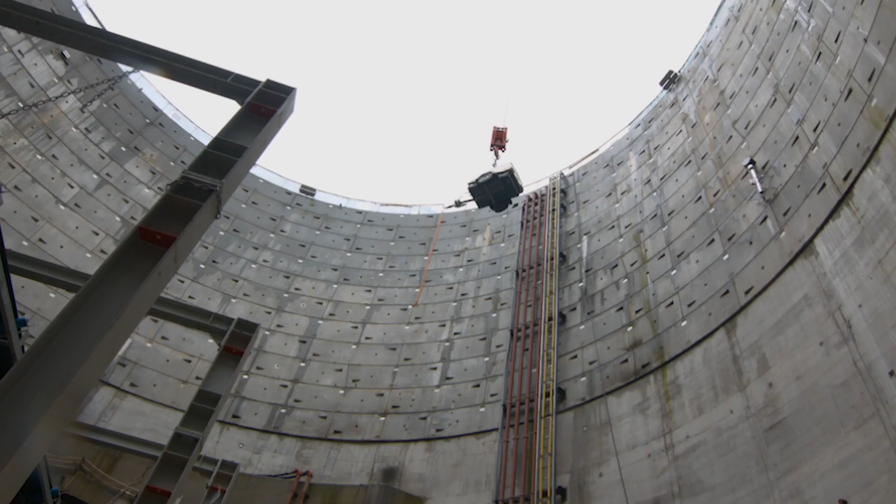It is not a new concept to avoid putting yourself in harm's way. Despite this, it is not uncommon for people involved in lifting operations to inadvertently put themselves in positions where, if something were to go wrong, they could be seriously injured.

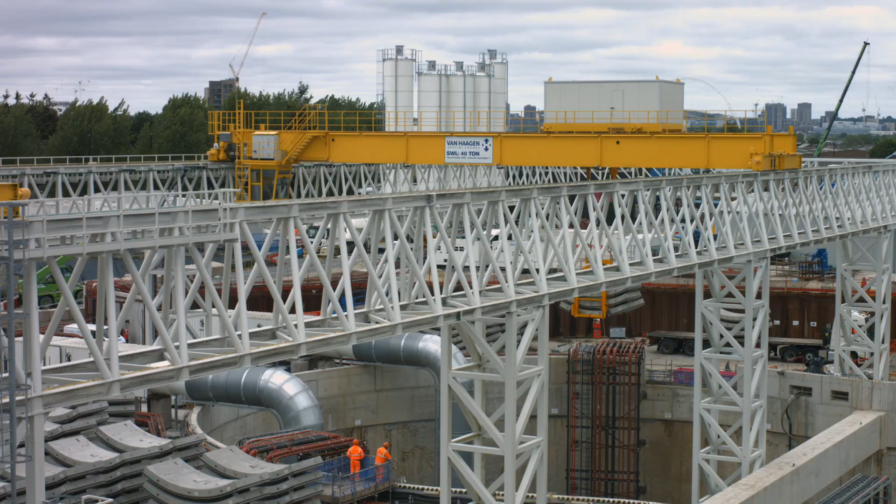If something starts to go wrong during a lift, people often act instinctively and physically intervene in an attempt to resolve the issue, rather than stopping the lift from a place of safety.

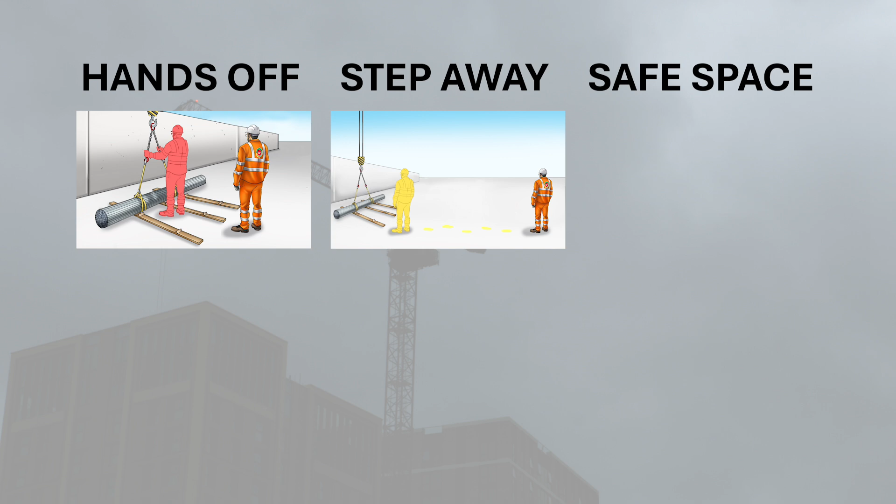This short production outlines the principles of hands-off, step away, safe space, which is about lifting personnel assessing their surroundings, identifying the hazards that are present, and whenever reasonably practicable, taking their hands off the load and moving to a safe space before loads are lifted.

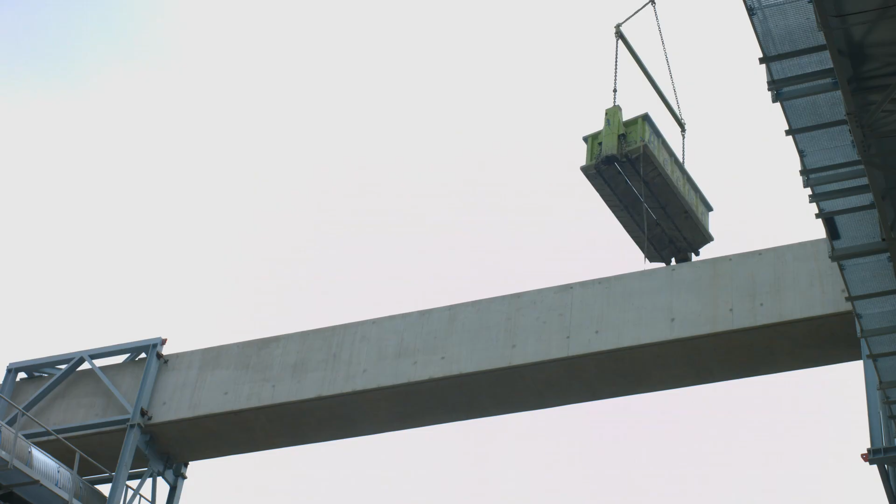We're going to be watching some typical lifting operations that you may encounter on a construction project and listening to an industry professional, Kevin Bennison, discussing the lifts with our presenter, Chris Simmons. They will be discussing how the lifting team carry out their role to ensure the safety of all personnel involved.

Sadly, there's been a lot of injuries in relation to people's interaction with loads, being in direct contact or close proximity to loads when they're being lifted. Many of those have been hand injuries, which are bad enough in themselves, but sadly there have been some fatal injuries as well of people being too close to the load. So we're going to look at some of these examples being put into practice.

So we're here and there's a lifting operations briefing taking place. Where would be the best place for the briefings to take place?

Well, that depends on the circumstances, but it would be worthwhile carrying the briefing out indoors, out of the weather, so you can get the full concentration of the team and cover some of the theory elements, some of the principles of the lifting operation. But a lot of the briefing, it would be really helpful to carry that outside, near the point of works, because then you could point out the loads to be lifted, how they're to be slung, the equipment being used, and things such as where the load's going from and to.

Good communication in the briefing, listening, eye contact. Keep it brief, stick to the main points, and ask for suggestions and confirm understanding. Great information. Briefings should be concise to ensure the key information in relation to the lift is communicated with clarity.

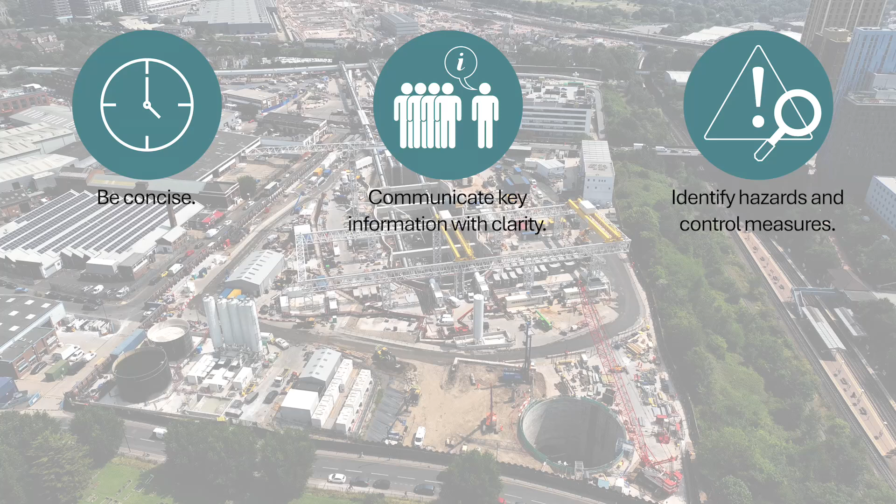The significant hazards that remain must be identified and the required control measures detailed. This will also start the process for the lifting team to consider where it will be safe to be positioned during the lift. All lifting personnel must be involved in the briefing.

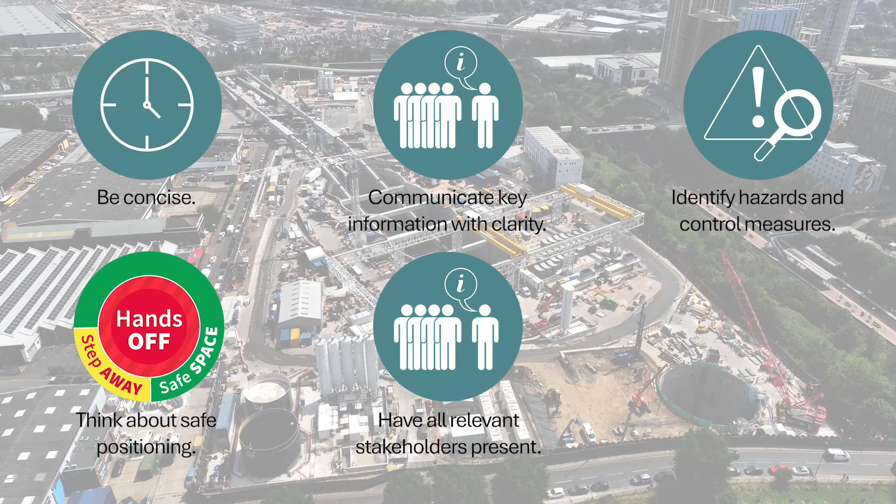It is an opportunity to confirm that the lifting team understand what was briefed and for them to ask any questions they may have.

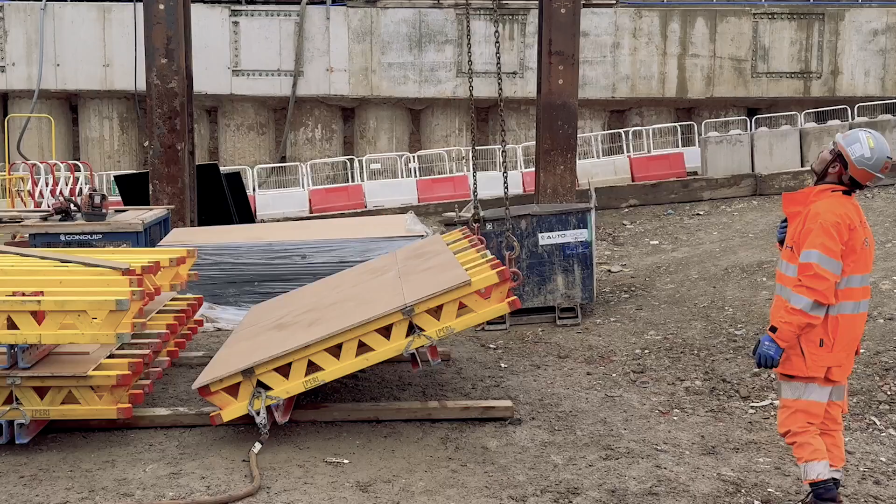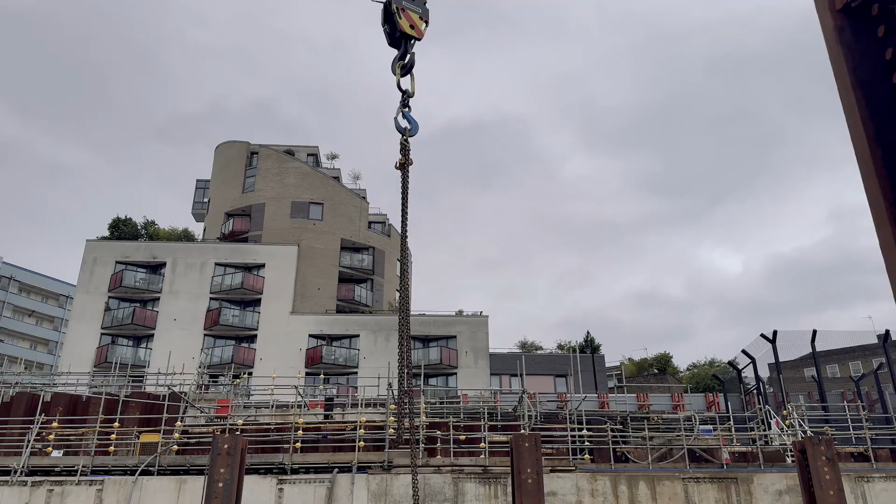We're lifting a formwork shutter panel, which gets used for pouring and shaping concrete. What the guys are looking at here is making sure the boom head stays as close as possible to directly above the position on the load, so that they maintain control of the load.

The risk we've got here, of course, is as that load is being picked up, it could move, and it's very difficult sometimes to ensure you've got the jib head exactly in the right spot to avoid any movement of the load. So what the guys have done now is they've come a little bit clear, and if the load does move, it's very unlikely to strike them.

A lot of people feel they have to be in close proximity to the load, and sometimes even holding it, whereas there are many situations where you don't really need to be in contact with the load, and it does give that little bit of safe space.

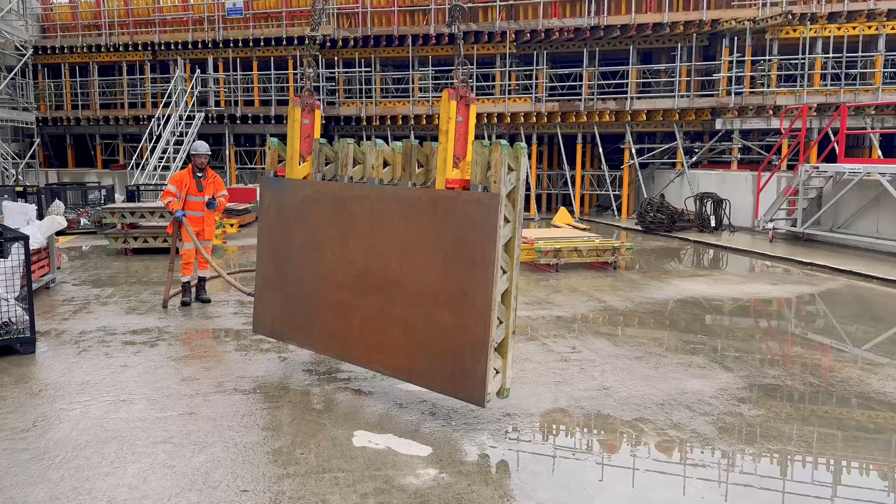They can clearly see what the load is doing in this case, they can direct the crane easily, but they're not so close that if the load moves, it's going to strike them. Rotation of the load might be required as part of the lift.

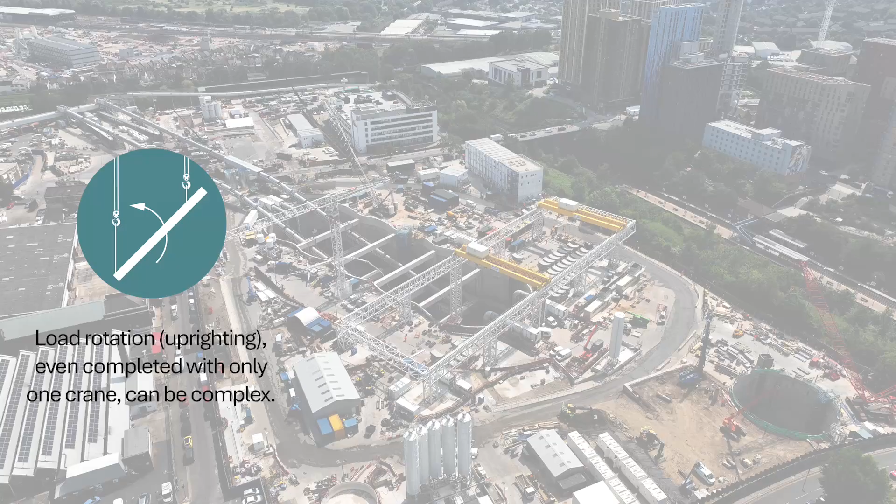Where necessary, this is done with two cranes, but often it can be achieved with one crane only. Formwork is a good example of this, where the load is prepared horizontally but then stood up by one crane only. This rotation of the load can lead to unexpected load movement if not undertaken with care, or if the crane is not directed to move with the load to keep the hoist rope, lifting accessories and attachment points on the load vertically aligned.

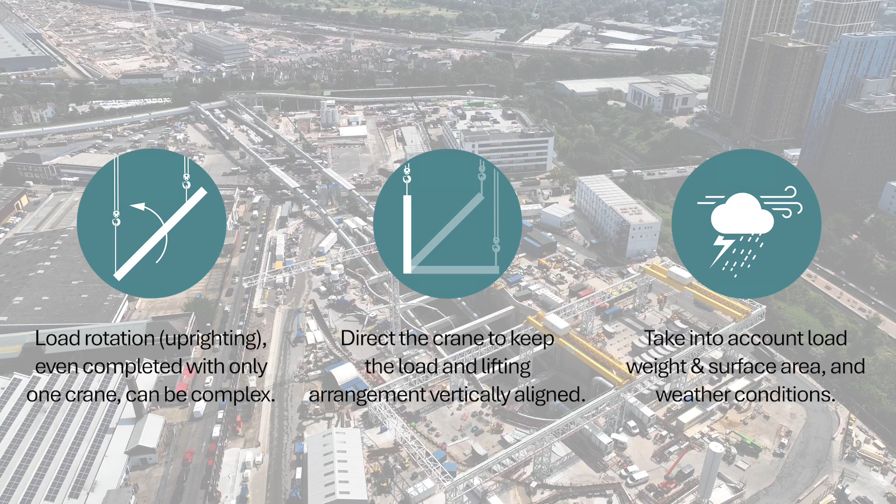Loads which have a relatively high surface area and a relatively low weight, such as formwork, are also more likely to be affected by the wind. This may cause the load to rotate or sway as it catches the wind.

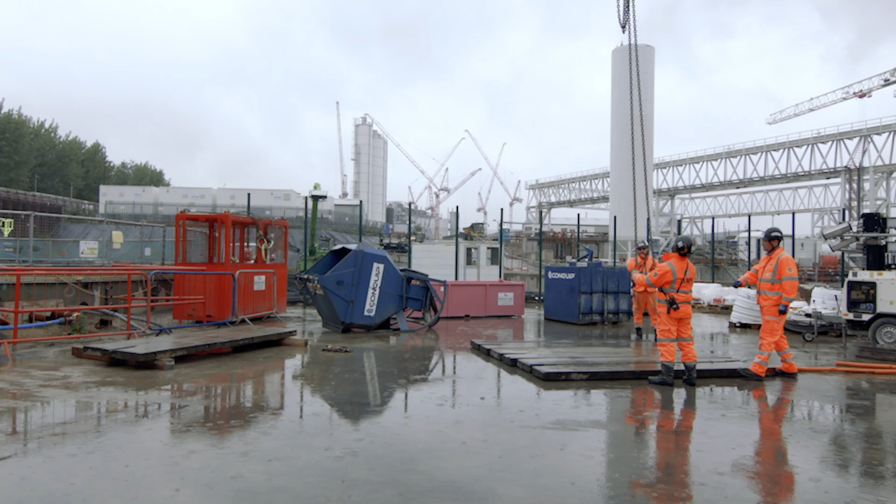So I believe that we're lifting some Ekki mats this time, Kevin, is that correct? Yeah. And what they're going to be doing here now is they're going to be stacking the mats on top of each other. The real risk there is you've now got definitely a crush risk for fingers.

So it's really important that they have their hands in a suitable position when they're landing the mats on top of each other, to avoid any serious hand injuries from those mats coming down on fingers, or fingers being trapped by the chain or whatever.

In a situation where the load was doing something that you didn't want it to do, it's just amazing that there's that instinct that sometimes kicks in for people to grab the load. I think being that couple of metres away from the load gives that time so that rather than putting your hands on the load and grabbing it if it's doing something you don't want it to do, you may stop the crane or just think of alternative action.

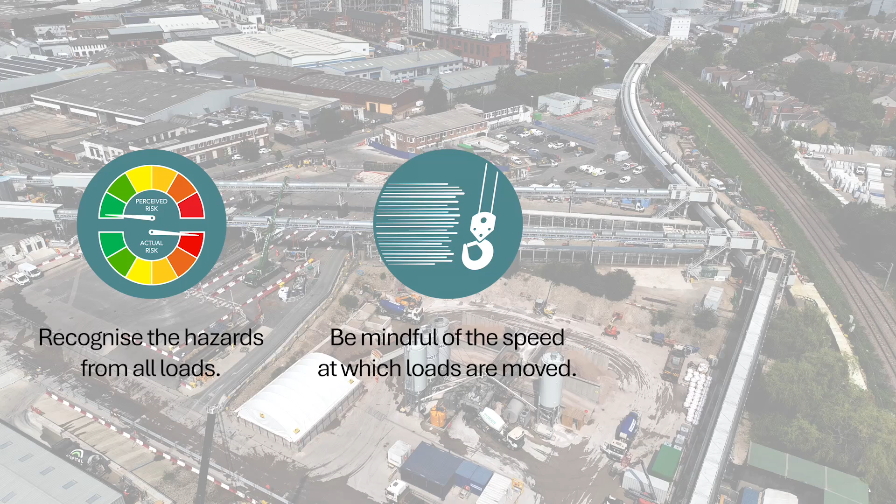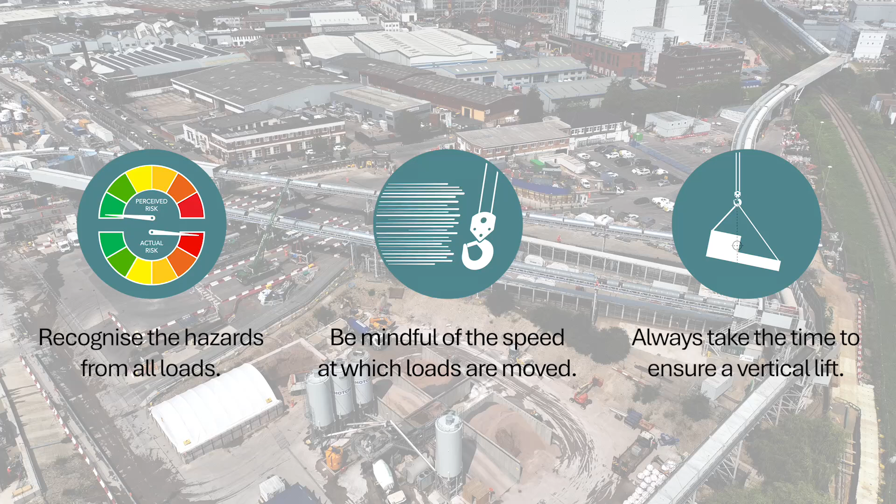Simple loads which are moved routinely are often perceived to be low risk. Because of this, they are often moved at pace, which may catch out lifting personnel. If loads are close together and fairly light, there may be insufficient attention given to aligning the hook over the centre of gravity before each lift starts. Loads which were perceived to be low risk can therefore still present hazards from unexpected movement.

So we're now landing the concrete skip. Yeah, it's going to get landed behind the concrete vehicle here just to get refilled, ready for the next pour. And he's going to use the marker here to help him with positioning the skip to get it in the right position, the ideal position for refilling it.

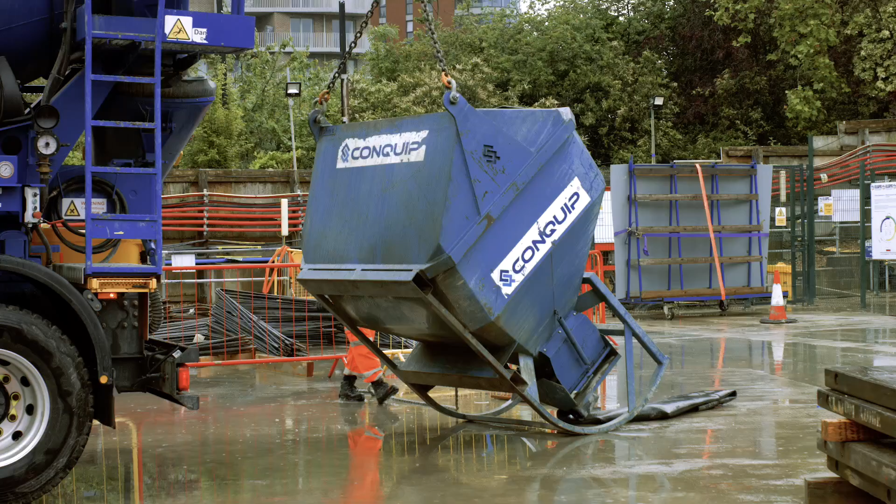This is a key point now where, as the skip's rolling over, you're not getting yourself in any bad position to end up being crushed or struck by that skip as it lays over. Watch the slinger signaller off to one side, clearly out of the way of the skip, still directing the crane, with a good clear view. So yeah, works well.

Really here, the main thing is trying to get the boom head directly above the position of the skip, so when it gets to that vertical point, you can bring it up vertically, minimising the load swing. There was a little bit of movement there, but that was nice. There's plenty of space, the slinger signaller's in a safe position, and that's the skip off, ready to go and get discharged into perhaps a formwork shutter. Yeah.

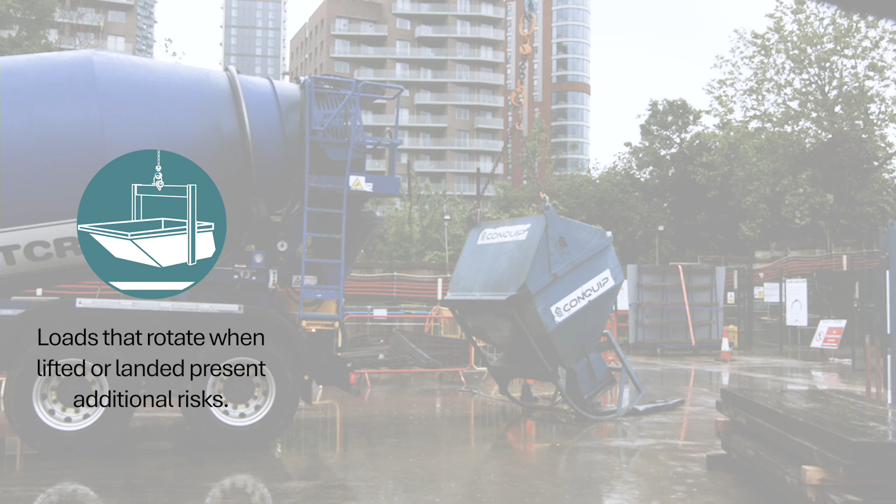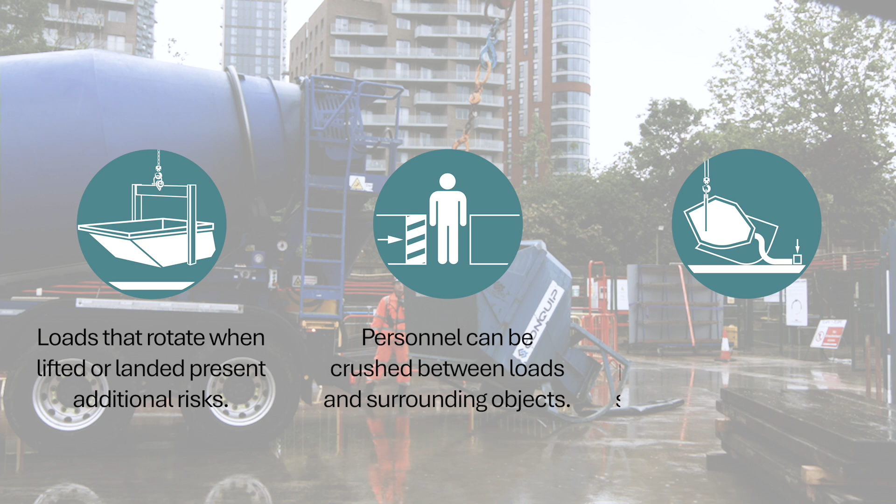Some loads are specifically designed to rotate when they are lifted or landed. If personnel are stood away from the load during this rotation, then it presents minimal risk to them. But conversely, if they are stood close to the load, they are at risk from the load striking them or from being crushed against any static objects. To assist in positioning loads such as these, it can be helpful to use positioning markers so that personnel can remain in a safe space away from the load.

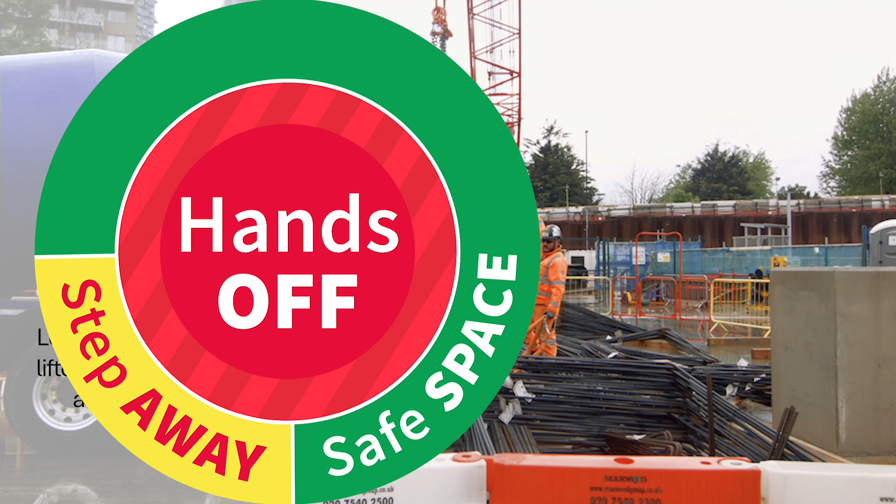So we're doing a trial lift here, is that right, Kevin? He's taking the load up just to a reasonable height off the ground, just around about waist height, so it's at a position that you can check the load fully, but it's not too high.

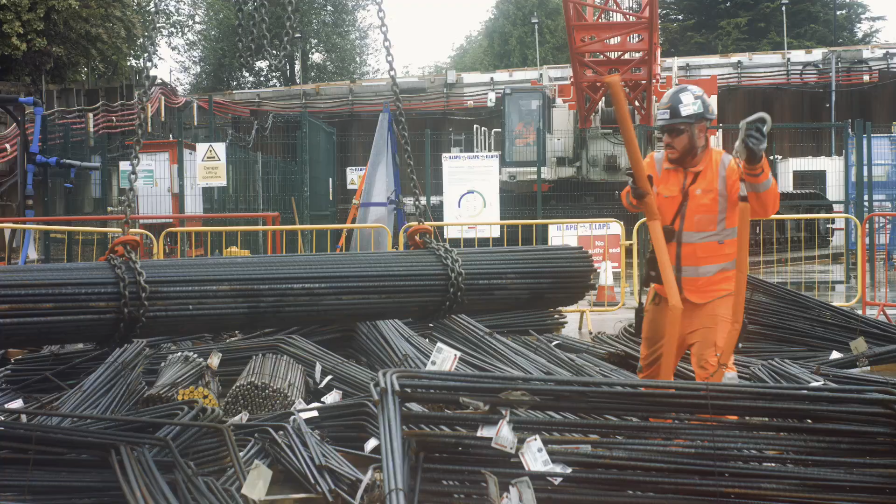I'd like to call it the 3 S's of trial lift, which is security, stability and slinging. You're checking that the load is completely secure and held by the slinging arrangement, making sure it's stable, level, balanced, and not going to come out of the slings. You're also checking the slinging to make sure slings aren't twisted, hooks are facing the way they're supposed to, shackles done up correctly.

And of course you would want to check every load that you pick up. You do a trial lift on every lift just to make sure it's safe to send off. A trial lift should be conducted for every load.

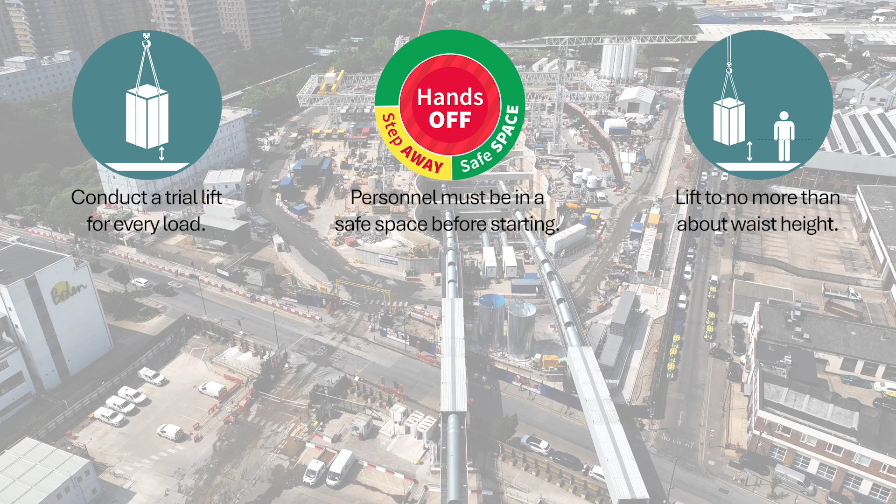Lifting personnel should be in a safe space away from the load before the trial lift starts. The trial lift should ideally be no more than waist height and will allow the lifting personnel to confirm 3 key things: load security, that the load is free from debris and that the whole load is contained.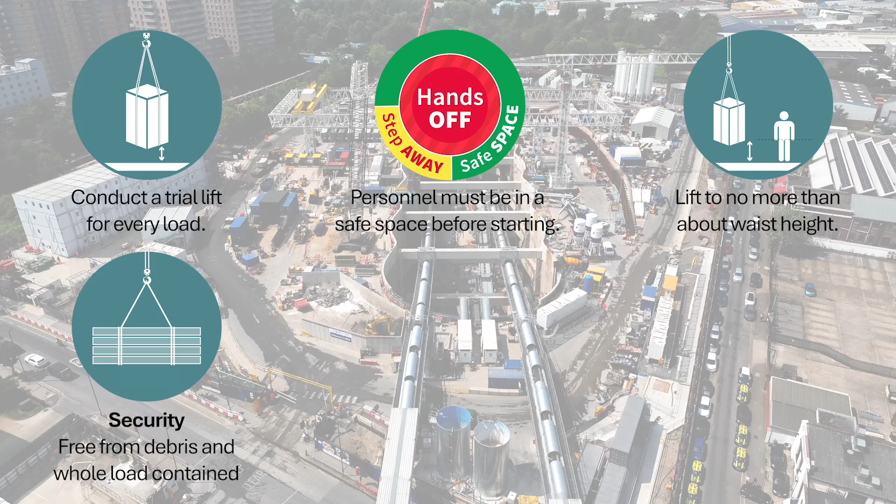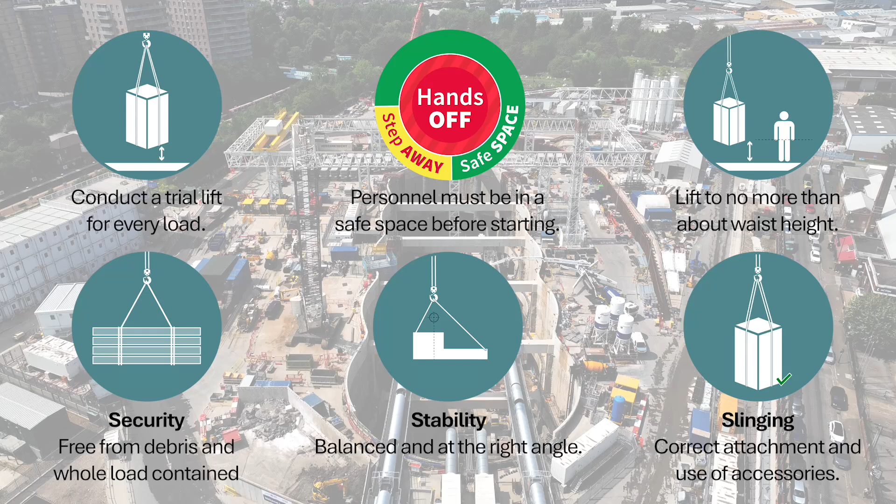Load stability, that the load is balanced and level. Slinging, that the accessories are correctly attached and being used at appropriate angles. If any issues are identified during the trial lift, the load must be returned to the ground and any necessary adjustments made before undertaking another trial lift.

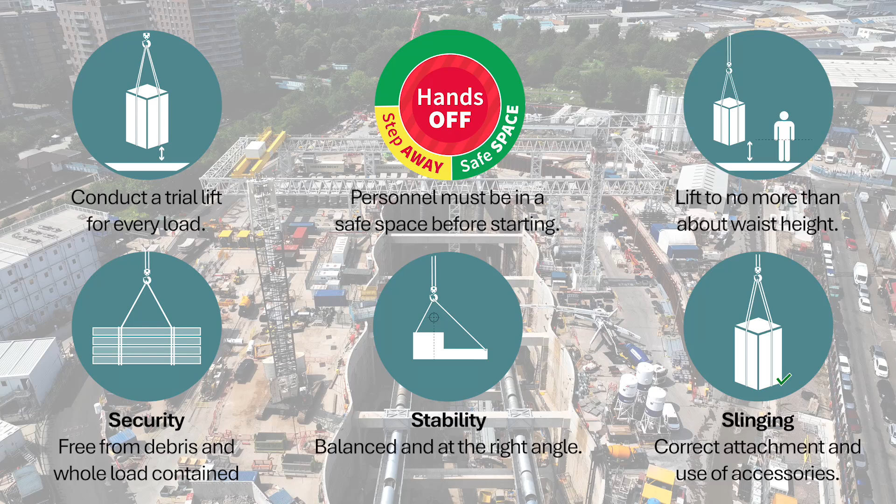One of the big things here, Chris, is they've got to look at where they're ideally going to sling the load to get that to come up balanced. In this case, there's lots of rebar there, lots of different things around them, so that can be quite difficult. But it's thinking about where we're going with the load and how can I get myself in a position that if that load moves in an undesirable manner through load swing or wind or the boom head not being in the correct position, I'm not going to be struck by it.

Their hands are off, we can see there's no risk of their hands being trapped on any part of the load or on the chain, which is good. They have taken a step away and they're about to commence the lift. So let's see what happens here.

You can see there, picked the load up, it's reasonably level, the one end maybe caught on something. There was a bit of movement on the load there, and you can see that where they were standing, they weren't in any danger, which is a good thing, because they'd already stepped back.

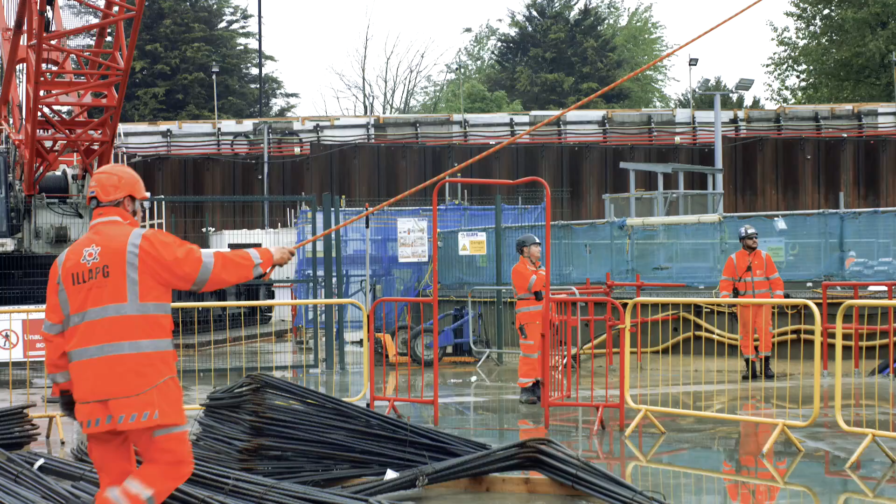The tagline is staying on the trailing end, so the load is always moving away from the tagline handler, and that's exactly what we want. We can see here as well, as the load comes up, it's vital on getting that slinging position correct so that the balance of the load is suitable.

Is this a push and pull stick he's got there, Kev? Yeah. What he'd done there was use that to actually retrieve the tagline, so that he wasn't going beneath the load to get the tagline, and pulled the tagline out towards him so then he can hold the tagline.

And good, he's using a push stick at the other end there just to stop the load from rotating and landing the load on these timbers. And there are, with regards to some points you can put your hands and it's not going to be problematic, but they didn't need to at all. That demonstrated there was just no need to put their hands on the load at all.

Now, of course, in some situations, if it's necessary, you could hold the chain above the choke and make sure your hand isn't in any position that it could be snagged by the chain or anything like that. But they didn't need to there. It was a great demonstration of actually not having to touch the load, which is exactly what we're trying to achieve.

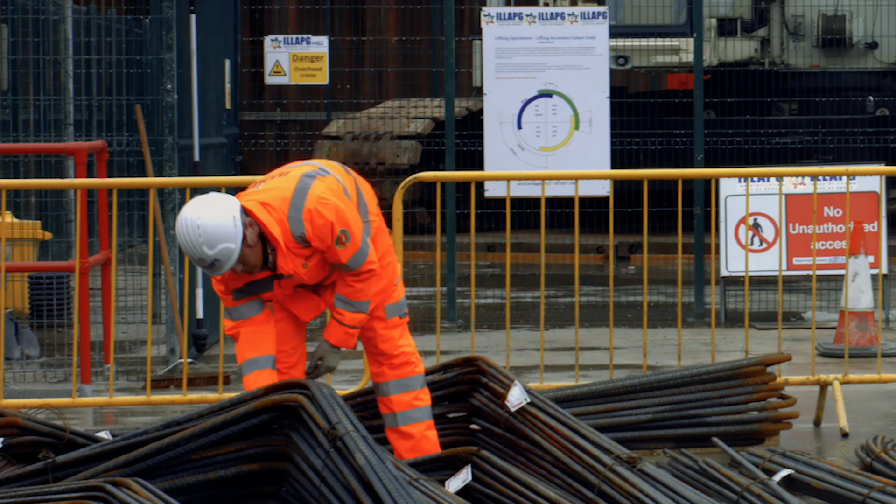Looks like at the moment there's the works manager, the supervisor and the slinger signaller in there. Who is it actually necessary to have within this restricted access zone at the moment? You'd never go in if there was no reason to be there.

Well that's pretty good here because clearly, now that the works manager had pointed out which load had to be lifted, he wasn't really necessary for being in there. And you've got to be confident, even if it's someone who's a senior rank, to ask them to leave. Of course, we're all human beings, Chris, so it's easy to make a mistake no matter what level you're at.

It's about being mature enough to ask people, whoever they may be, to leave the area if they don't need to be in there, and also for the works manager to be mature enough to go, oh yeah, fair one, I'm not supposed to be in here.

Bundled loads are likely to settle into the slings as they are lifted. If personnel were to have their hands in or on a load when this happened, there is a high risk of crush injuries. Loads can also snag on obstructions, particularly if they lift up slightly out of level, and this can lead to the load moving unexpectedly, potentially springing up, as well as moving within the bundle. If a load gets snagged, there is the potential to damage or break either the lifting accessories or the attachment points on the load.

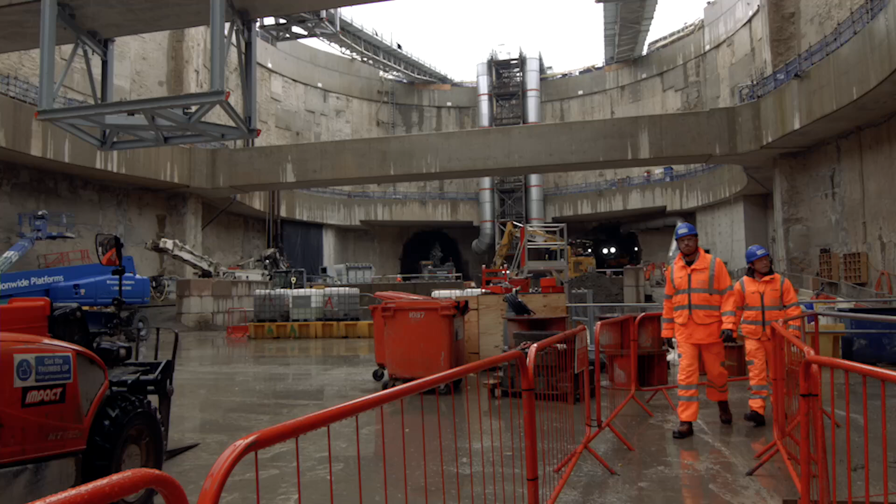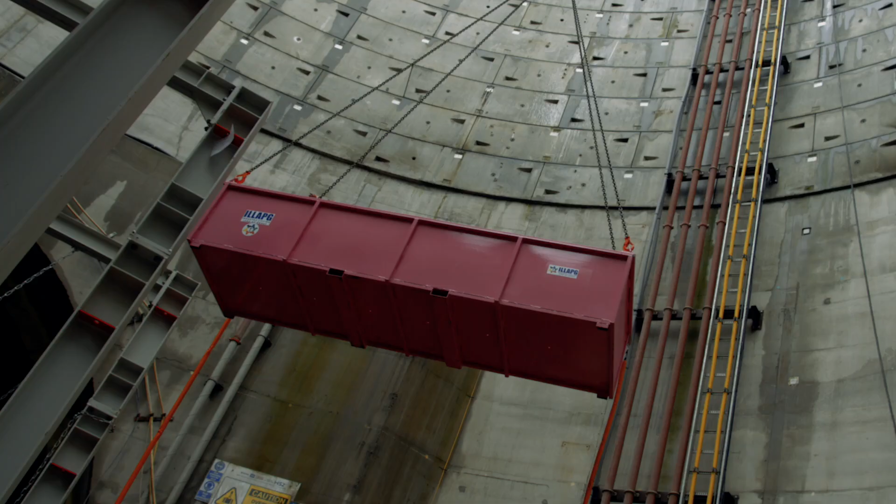You happy with the taglines here, Kevin? Yeah, so one of the guys there is going to reach out with the push-pull stick, grab the tagline, and then be able to take full control of the load. And of course, it depends on what the situation is to evaluate where the best place for the taglines is. If you've got two people on the taglines, it's actually best as it is where you've got the taglines on the same side of the load. That way, one can pull against the force of the other to make sure that nobody actually needs to go beneath the load.

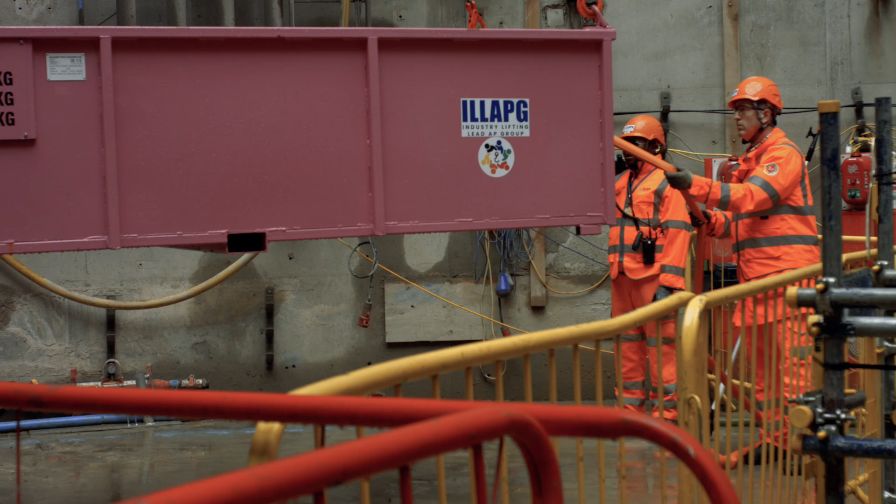The main thing here is the direction the load's going. So it's going into potentially quite a confined area here. And it's about thinking about where is the person in relation to that load. The signaller's in a good position, and you can see where the crush zone is now potentially being created as that load approaches one of those fixed objects. And the guys are clear of that crush zone, which is good.

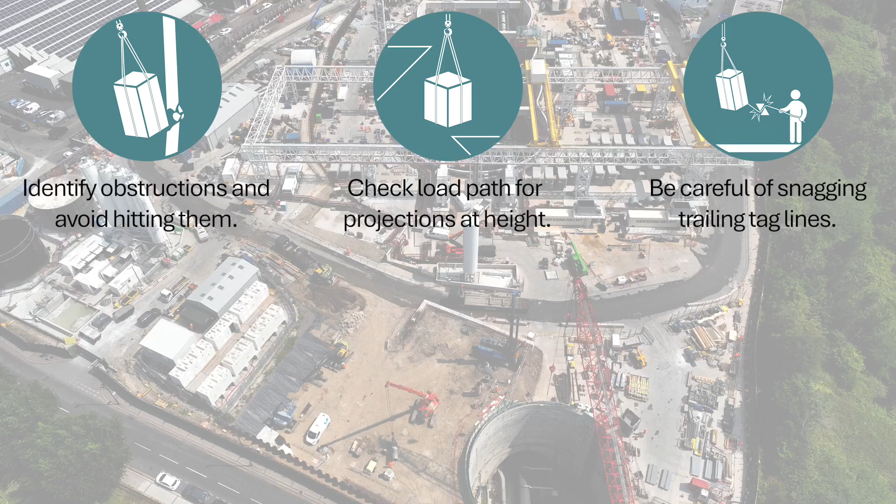When lifting into or out of locations with limited space, always be aware of the potential for part of the load, any lifting accessories, or a tagline to snag on any obstructions or projections in the space. There is also the very real risk of inadvertently placing yourself in potential crush zones, created between the load and static objects as the load is moved.

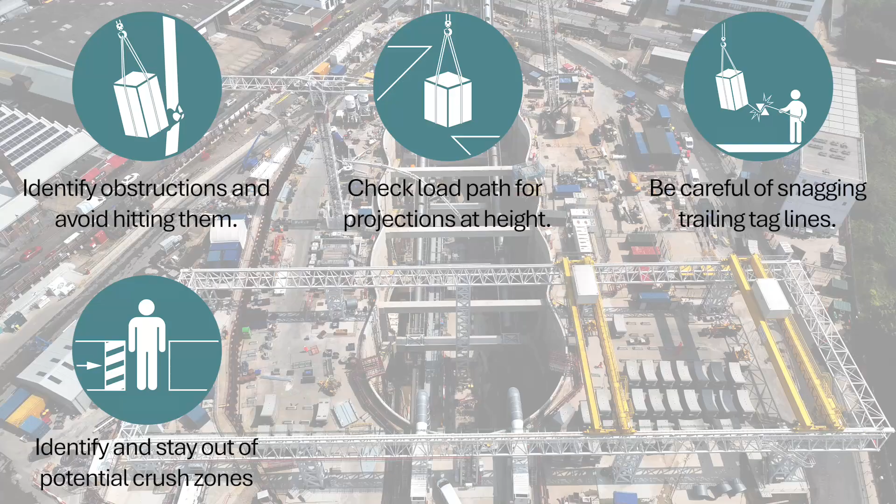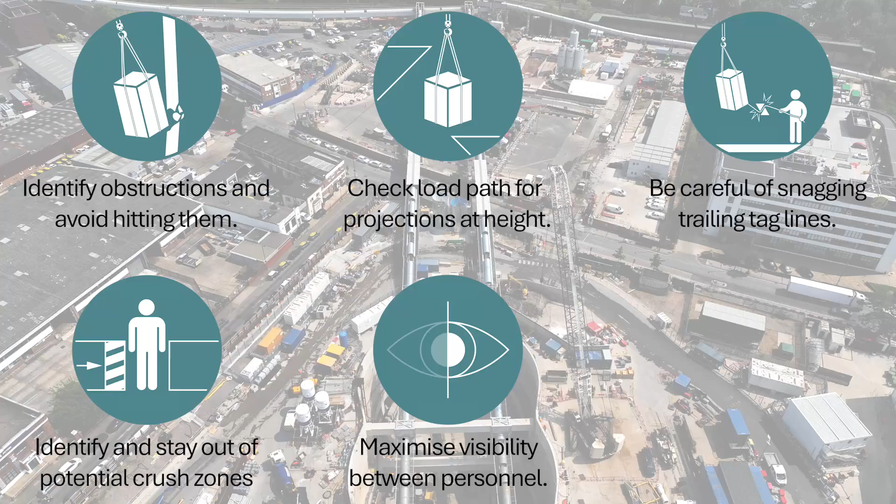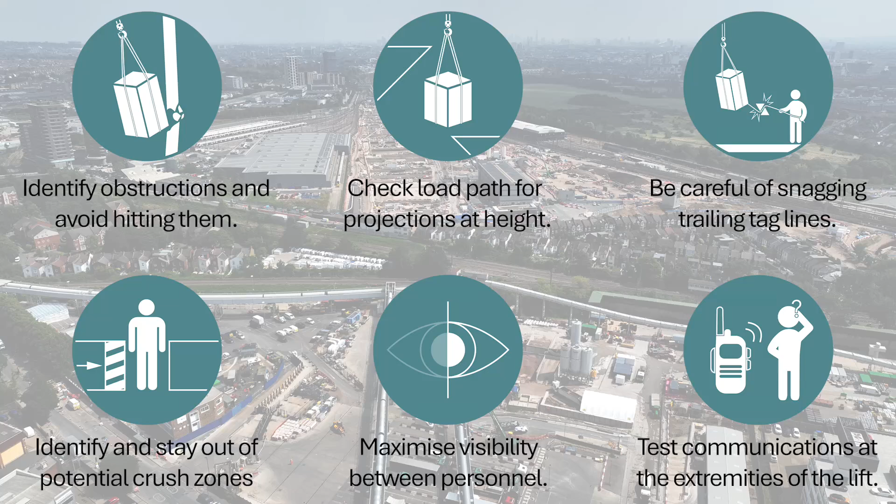In locations such as deep excavations and shafts, there is also the possibility of the lift being blind, where the operator and slinger signaller do not have a direct line of sight of each other. In these cases, which can also happen when lifting behind or to the top of structures, there is the potential for unexpected load movement, either as a result of communication failure or misunderstanding.

Well, Kevin, it's been a fascinating day for me, looking into your world. The clear message I'm hearing is the importance of communication, the three really important factors of HOSAS, and the importance of being brave enough to stop the crane. The hands off, step away, safe space, just stopping the crane if there's something undesirable happening. Rather than looking at this as, oh, we're not going to have hands on the load. That's not what this is about. What this is about is really evaluating whether it's necessary to have hands on the load. Let's just make it so that hands are on the load through necessity rather than habit. Great. Thanks, Kev. Be safe.

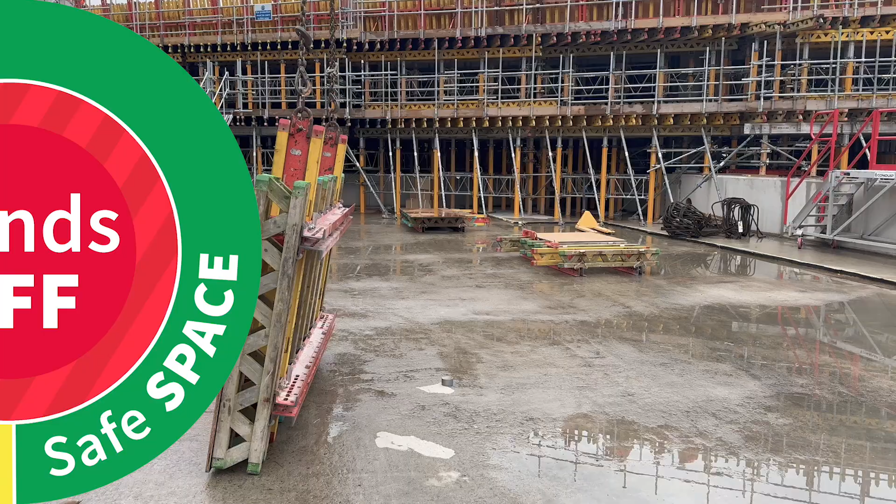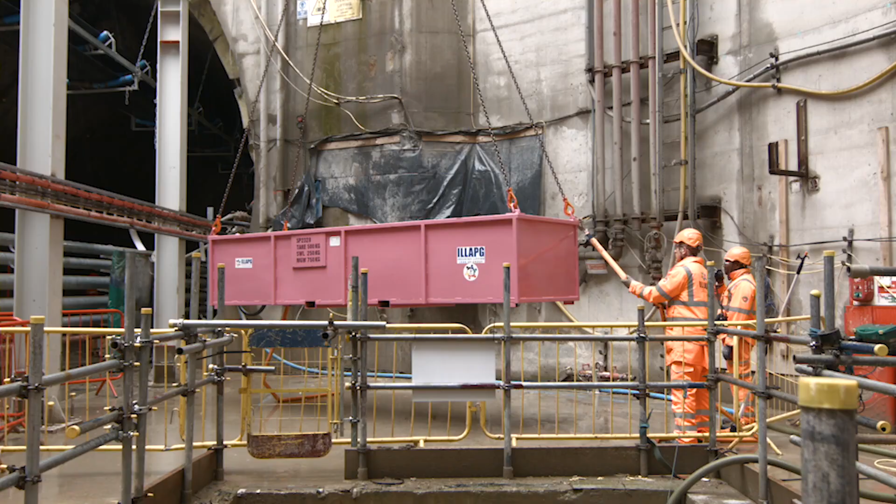During the course of this film, we've seen some examples of typical scenarios you will encounter during lifting operations on a construction project. We looked at some of the reasons why unexpected load movement may occur, and we discussed how this is most likely to occur at the start of a lift. There are, of course, more causes of unexpected load movement relevant to the environment you work in and the types of lifts you do. The key principle, however, is that lifting personnel must assess their surroundings before starting and undertaking a lift. Once the hazards present have been identified and assessed, lifting personnel are able to identify the safe spaces to be during the lift.

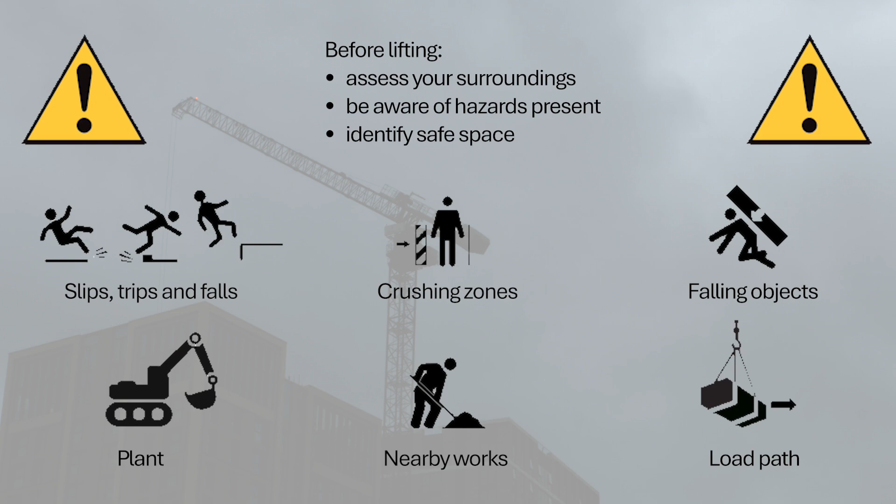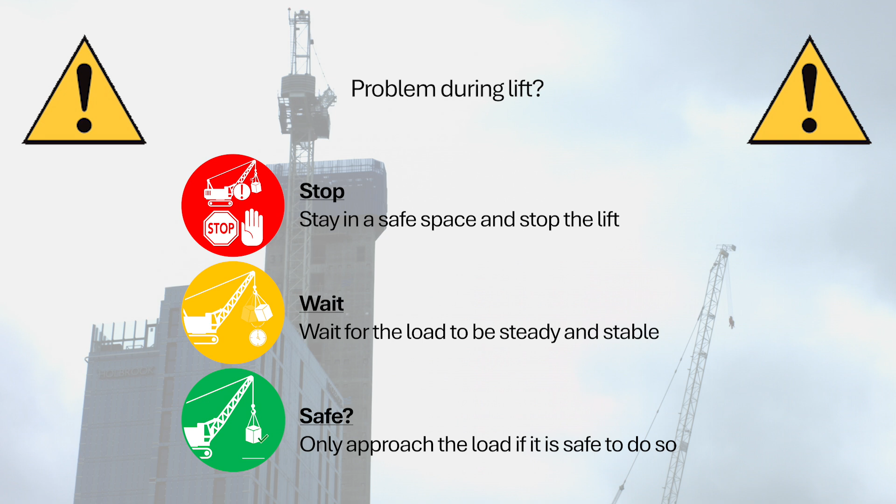Before picking up the load, personnel should take their hands off the load, step away, and move to a safe space. If there is a problem, the lift must be stopped. Personnel must not approach the load until it is steady, stable, and safe to do so. We hope you are able to use the principles shown in this film to raise the safety standards of the lifting operations you are involved in.